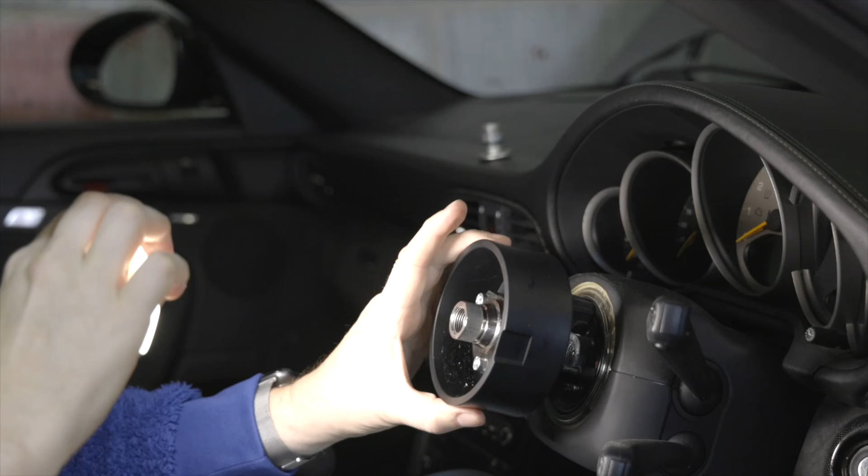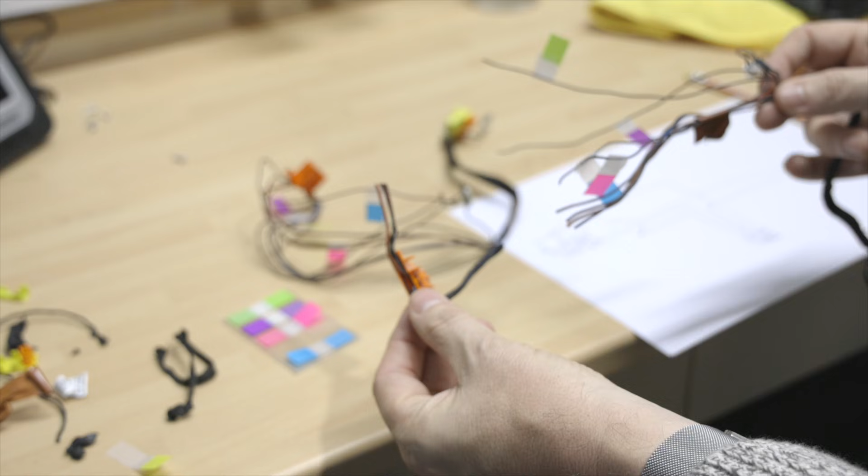Last episode, I purchased a new steering wheel extender boss for my 911 to improve the driving experience. This is something I plan to install myself. At the same time, I plan to fit a brand new wheel I'd bought a few years ago. The job should have been straightforward, however the steering boss included a substandard wiring solution which just didn't work. So I elected to modify the existing loom in the wheel by cutting two of them up and soldering them together. This is when things didn't go exactly to plan. There's a problem though, the horn's not working. In this episode, I'm hoping to fix those issues so the job can be ticked off as completed. Plus, I now have an official Porsche computer, so I'm hoping to make a few modifications to the car's electrical systems.

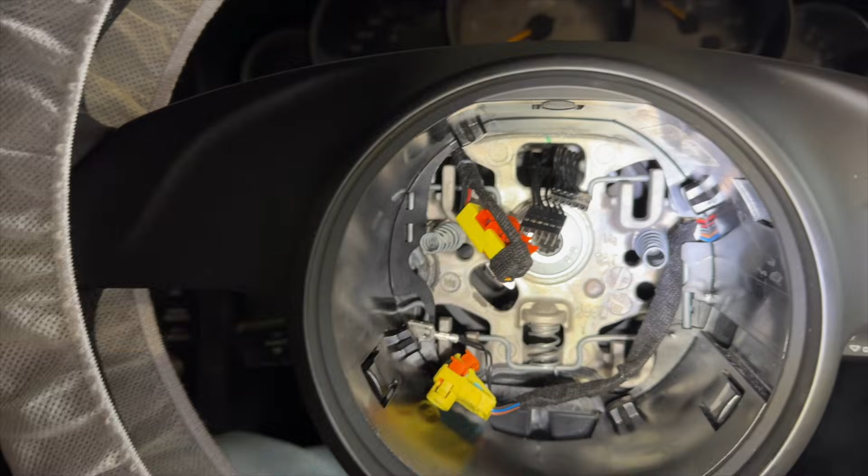When I did the wiring the first time, I had the two looms and I cut the first loom. I thought all of the wires were different colors, so I thought I could just cut the pieces off each one that I need and solder them together, and that's it, I'm done. But after I cut it, I realized there were four black wires and I didn't know where they went. So I realized I had to trace those wires and keep a record, so I drew a makeshift diagram of all of those black wires. I made that diagram and then I soldered all of the wires together as per the diagram, or so I thought, and fitted it to the car.

Well, I just unraveled the entire loom. I unraveled it all and traced it. I did a continuity test and realized I got two of the wires crossed. One of them was going to a center plug that goes to the horn, and the other one was going to an earth, and I'd got them cross soldered. So once I did the continuity test, I realized I made a mistake, and now I'm fixing it. Hopefully now when I go back to the car, the horn should work.

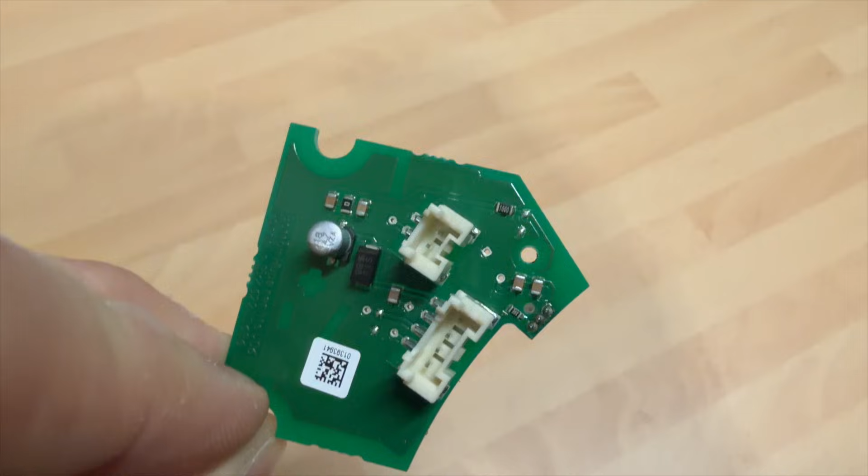I've also confirmed that little circuit board on the left-hand side of the wheel is for the horn. There's a magnet inside the airbag, and when the magnet lines up with that little piece on the circuit, that's what makes the horn beep. If that wire is not connected, that's why it's not working. So I'm going to solder these things back together, and then I should be good to go.

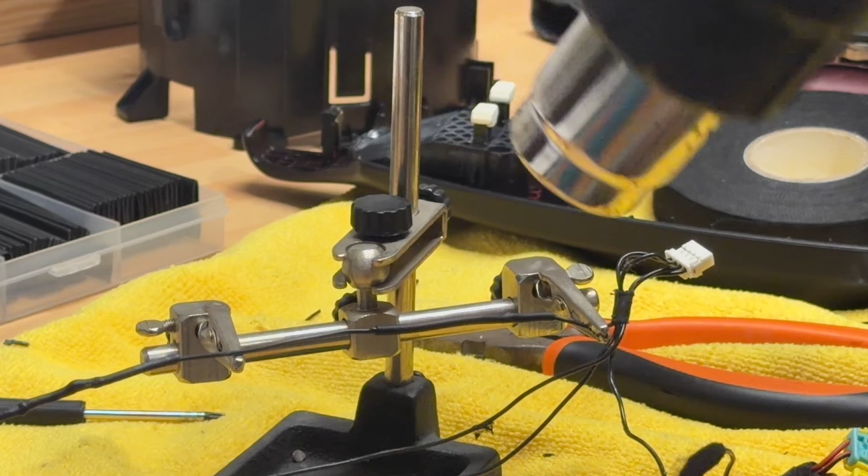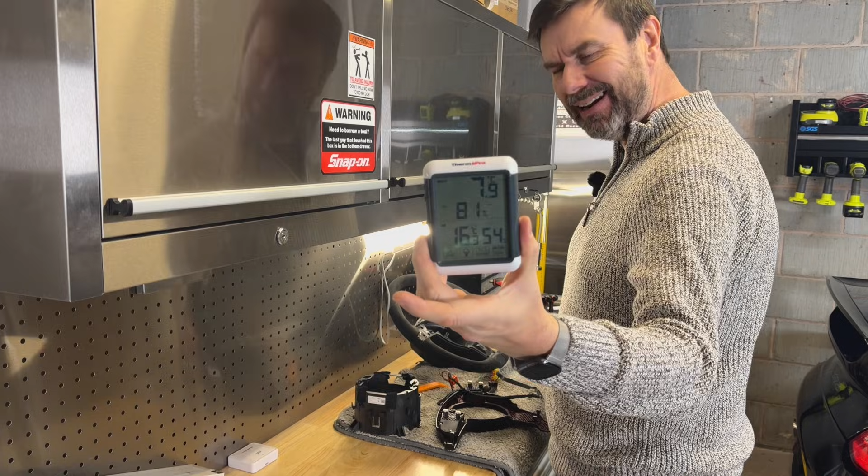So I'm back in the garage, just got to put this back together. It's positively boiling in here now—it's 8 degrees. So we just need to reassemble the wheel, hopefully for the last time, and then put this back in the car, and this should work. That's looping in there like this. As you can see, it's a bit thicker than it was, so we just got to make sure that plug is plugged in here.

Okay, so the wheel goes back on. Right, so that's in. I'll put it in, but not tight—just have to remember to go back and tighten it up properly afterwards. Right, so that's on, make sure that wire goes back in its little groove. All right, so that's on now. Here we go, this is it. Here goes nothing, now reconnect the battery. Hopefully the airbag light goes out again, and then the horn should work when I put the key in.

Here goes nothing, airbag light go off please. Airbag light is off. So there we go—a working horn and a working airbag. Oh man, I'm so relieved, what a drama that was. Unbelievable. Wheel is on, all nice and shiny, or not shiny as the case may be, because it's matte finish. The only thing left to do is put the yellow stripe on, and this is good to go now. This is working, everything's working, so I'm happy.

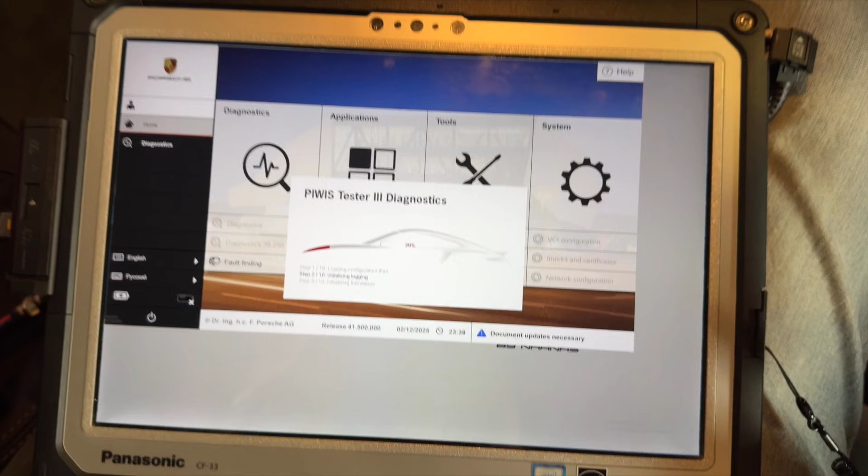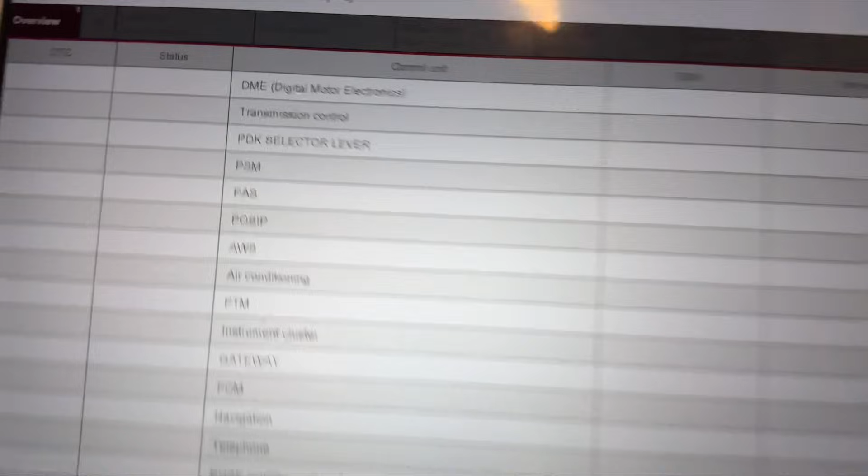So when you initially log into PIWIS, you get all of this list here. You can see electronics, PSM, PAS, all of these acronyms, power assisted steering, PSM. I've got a PSM failure on my car right now, but that's just purely because I disconnected the battery. That always happens if I drive the car 100 meters or so, so I'm not concerned about that one.

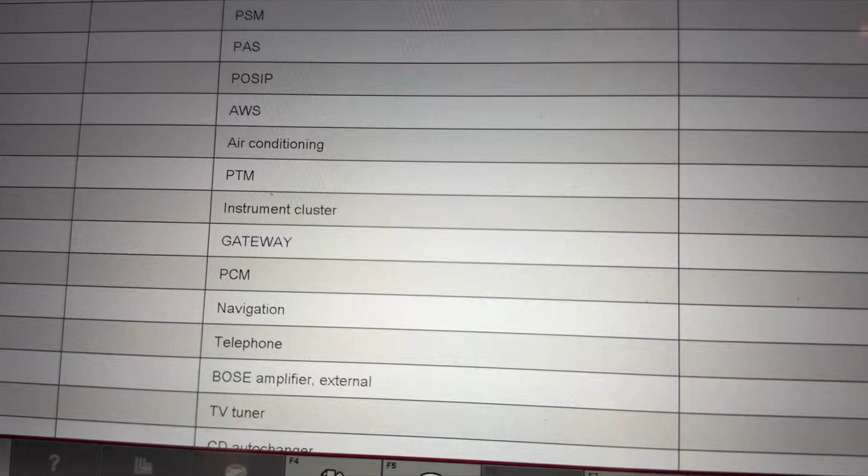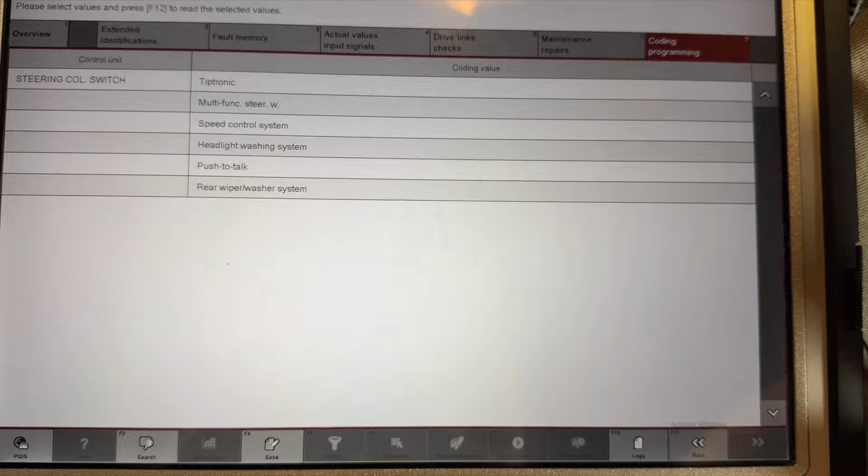But we've got all of these different things in here: instrument cluster, navigation, telephone, etc. If I scroll down here, I go to steering column switch, then programming, and you see there I've got multifunction steering wheel. It says installed. So if I click on the list, I get the option to say not installed, and when I go down here it says right. Click on that.

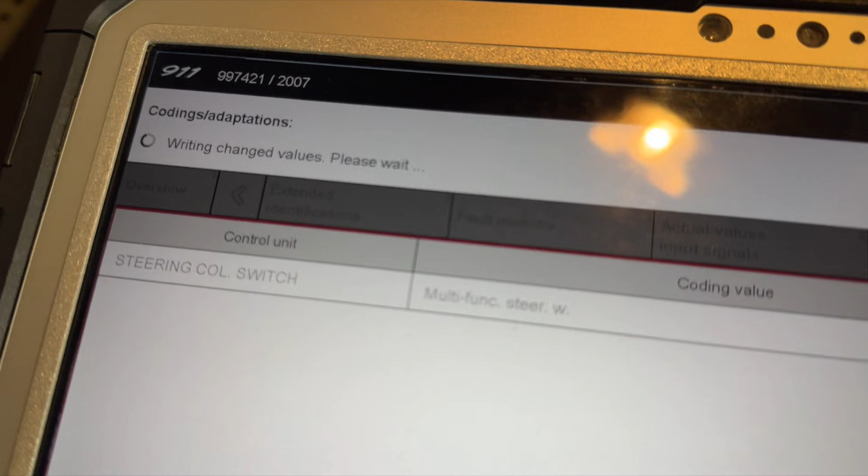And then up here, writing, code has been written successfully. There we go, that's what we were after. So steering column switch, no programming. Yeah, I've set the multifunction steering wheel to off.

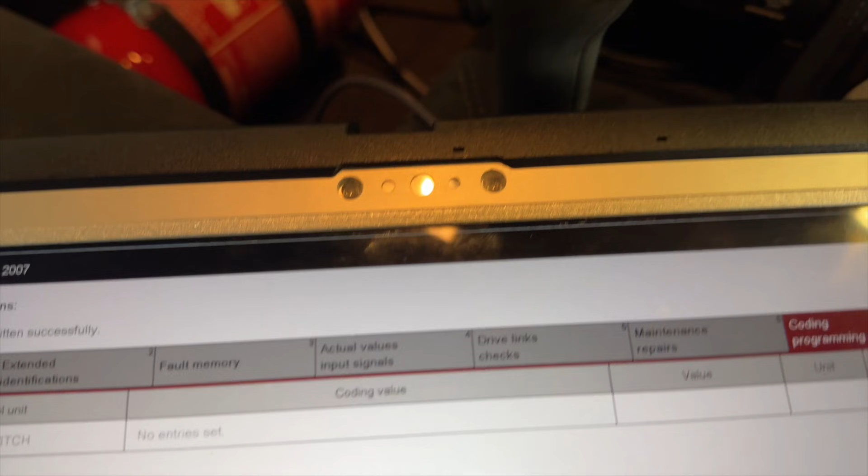Now there's a problem—look, the horn's not working. So it is right: to get the horn to work, you have to activate the multifunction steering wheel in PIWIS. So if I activate that now and say it's installed and write it to the memory, let's see. All right, so that works.

It's true, if you are fitting a Gen 2 steering wheel to your Gen 1 Porsche, regardless of whether you have a multifunction steering wheel or not—I did originally have one—you have to have that activated to get the horn to work. If you deactivate the multifunction, or if you didn't have one to begin with, and you don't set that code in PIWIS, the horn won't work on your car. So that's just something to bear in mind.

It's annoying to get that code every time, and I think if I replaced the control unit for the steering wheel to the Gen 2 version and coded it to the car, then I could clear that and turn off multifunction. But I don't care really—as long as the horn works, that's all that matters, right?

Now, one of the things that I've always wanted to do is there's a stopwatch here, and it only illuminates when you're using the stopwatch, right? So if you're driving at night, for instance, and your lights are on, the light inside of here is not on. I thought it was broken actually, and I was trying to investigate why. Then I found out it's actually supposed to be like that—it's only supposed to activate whilst you're actually using the stopwatch, which is never.

So I want to have that illuminated whenever I turn the headlights on. Some people don't like the stopwatch—I don't particularly like it either. I just like it to be illuminated so it doesn't look like it's broken to me.

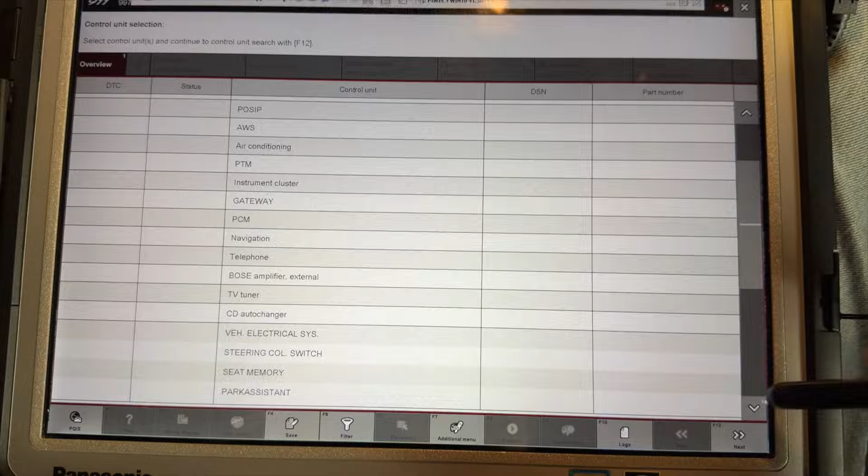So head to PIWIS. If I go into this list here, I go down to stopwatch, click next, and then I've got stopwatch. I say coding—now there's not a lot of coding that you can do to the stopwatch. But when I go into this next section, you see it says illumination settings.

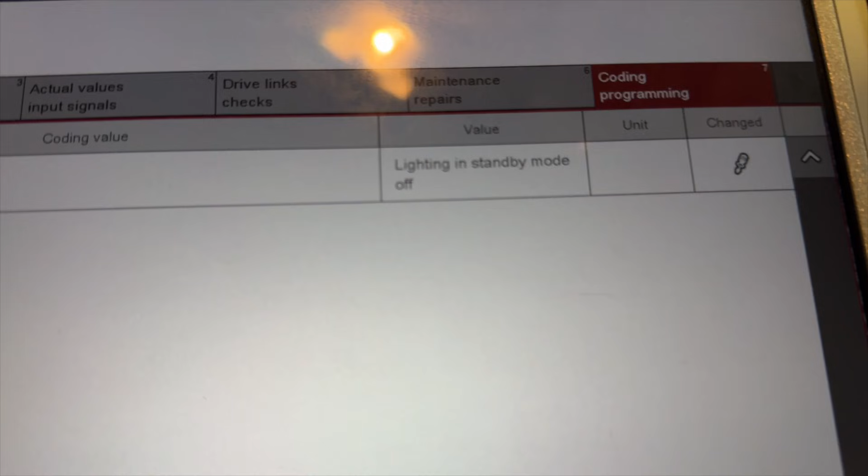So it says lighting in standby mode off. If I say on and program this, click go—now you can see, whoops, the stopwatch has just recalibrated itself.

Now if I go and switch on the lights, you can see now that the stopwatch illuminates when I turn the headlights on or when I turn the lights on. So now it works all the time.

The only thing that I would prefer is that it says 0000, and that's staying on as well. Ideally I'd like that to switch off and just the lights in the illumination around the edge to turn on, but that's apparently not possible, at least not from this menu, because that's the only option I've got. I like that, so I'm going to leave it like that, and I'll get used to it.

The zeros—it's on the newer cars, that's a clock, but you can't, at least with basic PIWIS programming, change that. There's probably some way to change it, but I haven't discovered that one yet. But that's the result.